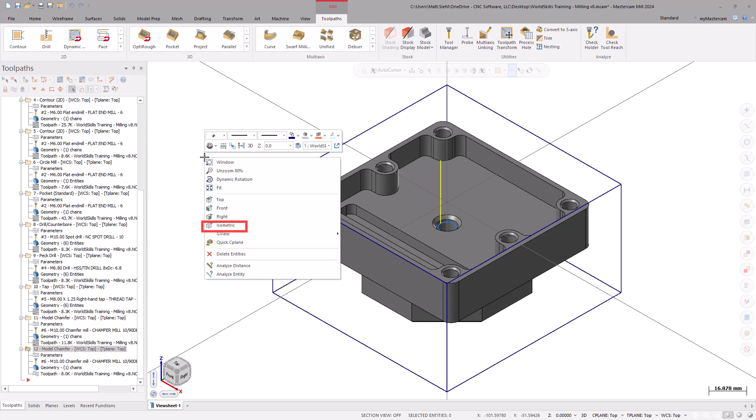Before we begin the second side, let's verify our toolpaths machined correctly. If necessary, right-click in the graphics window and select Isometric to get a better view of the model. Now, select the machine group at the top of the Toolpaths Manager, then select Verify Selected Operations. In a separate window, the Mastercam Simulator launches.

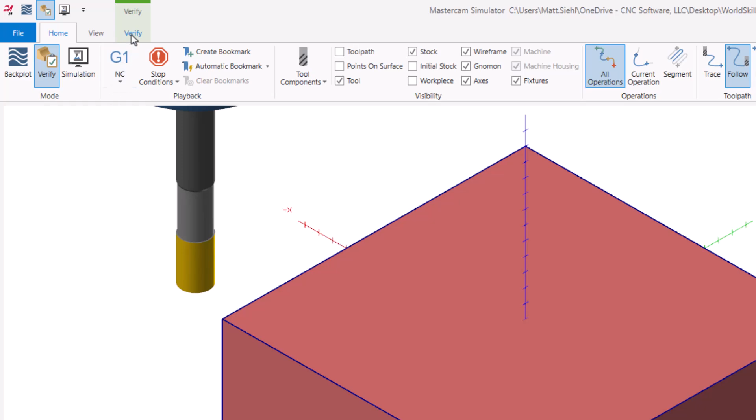Inside the Mastercam Simulator, there are three separate modes you can choose from: Backplot, Verify, and Simulation. The tools available inside the Mastercam Simulator will vary based on the mode we are in. Staying inside Verify mode, under the Verify tab, select the Color Loop option. This will help break up the different toolpaths on the playback bar and make it easier to pinpoint any collisions.

Press play to watch the simulation run through. The simulation shows the expected toolpath motion and removes material from the stock definition provided.

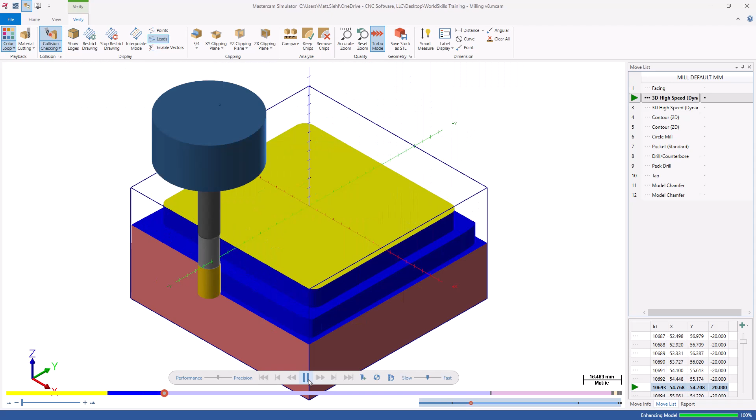After the Verify simulation is complete and you have finished analyzing the toolpaths, feel free to exit the window. Back in Mastercam, let's continue with the part. If necessary again, right-click in the graphics window and select Isometric.

Before we create the second planes and toolpath groups, we should edit and add a viewsheet to the part file. Viewsheets are quick and easy ways to create different part views, each on their own tab. Right-click on the viewsheet and select Save Viewsheet as bookmark. This saves the current view to the viewsheet.

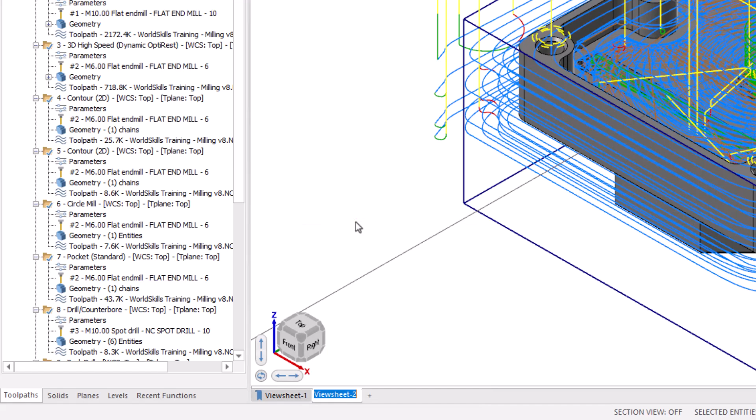Right-click again and this time select New Viewsheet. Then name it Second Side. When we are finished creating our secondary plane, we will save the new view to the second side view sheet.

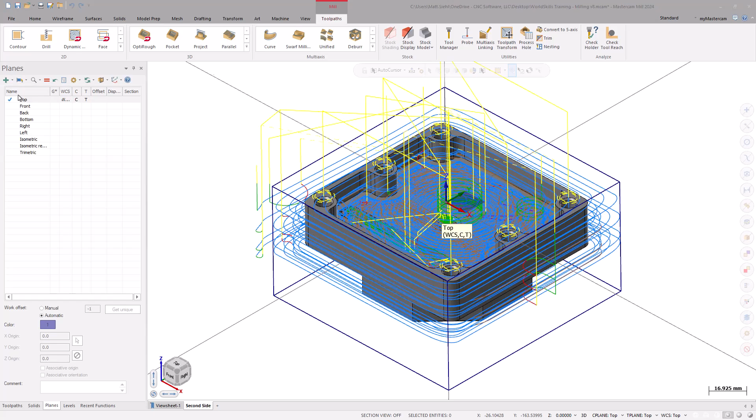Select the Planes Manager tab to bring it to the forefront. At the top, select the Create a New Plane drop-down menu, then select From Solid Face. Using the middle mouse wheel, press and hold the wheel to move the model around to get a good view of the second side.

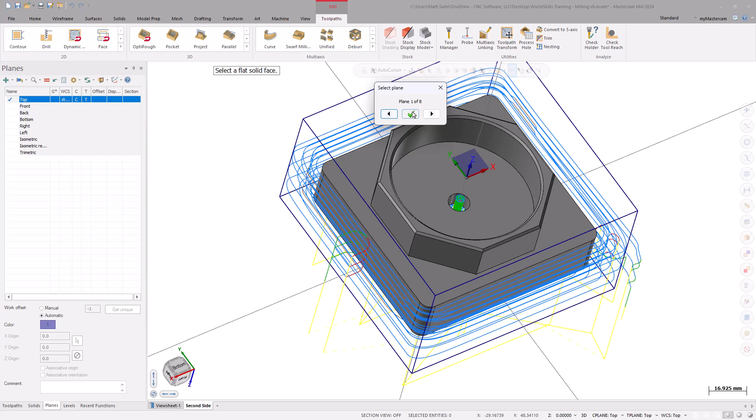Select the top flat face. The Select Plane dialog box displays. Toggle through the pre-generated axis combinations to find the proper combination, plane 1 of 8. Select OK. In the New Plane Function panel, rename the plane Second Side.

Under the Origin options, adjust the Z origin from -40mm to 0. This will move our Z origin to the previously machined face, allowing for easier setup repeatability when machining.

Under Work Offset, set the radio button to manual, then change the offset number to +1. When creating toolpaths for the second side, this will assign them to the G55 work offset. Select OK to generate the new plane.

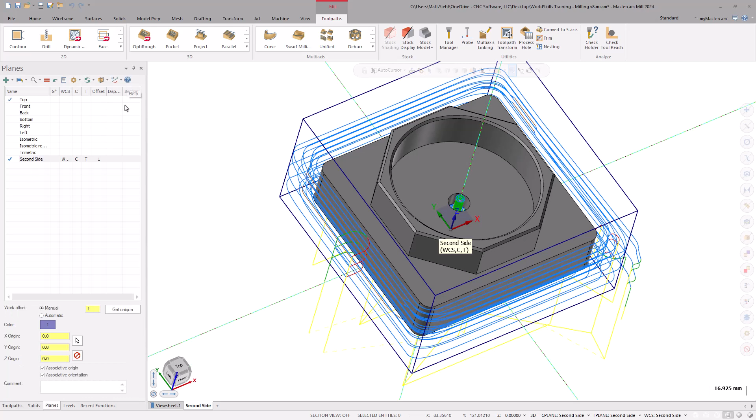This second side plane is our new work coordinate system. If we right-click in the graphics window and select Isometric, we now get an isometric view relative to our new plane. Right-click on the second side view sheet, then select Save Viewsheet as bookmark.

With the new plane made, bring up the Toolpaths Manager. Then, right-click on Machine Group 1. Move down to the Groups menu, then select New Toolpath Group. Rename the group Second Side. This will help organize the toolpaths in the part file.

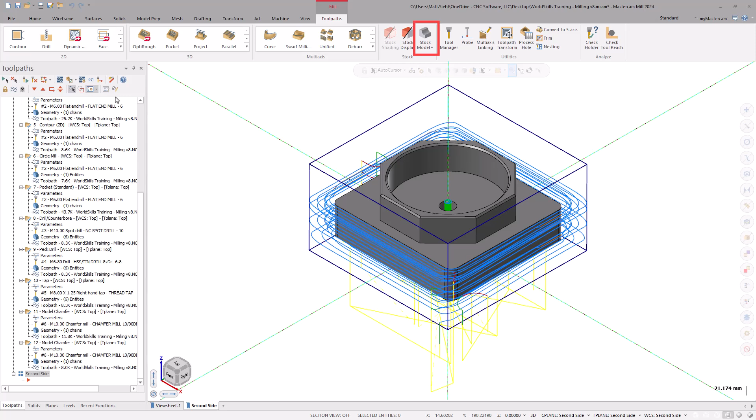Before we wrap up this episode, let's walk through creating a stock model to get a better visual of the part. Under the Toolpaths tab, select Stock Model. In the Stock Model page, set the name to Second Side. Now, at the bottom of the page, select Stock Setup.

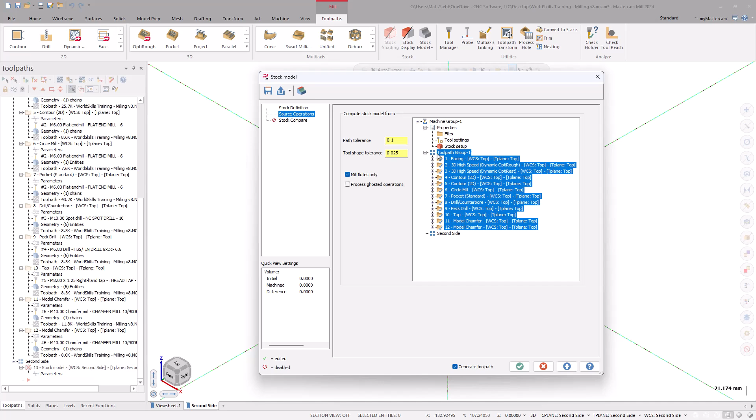This will now reference our stock setup from the first side operations. Under the Source Operation page, select Toolpath Group 1. The stock model will now process these toolpaths against the stock defined. Select OK to generate the stock model.

Now, we have an accurate visual of what the second side will look like when machining.